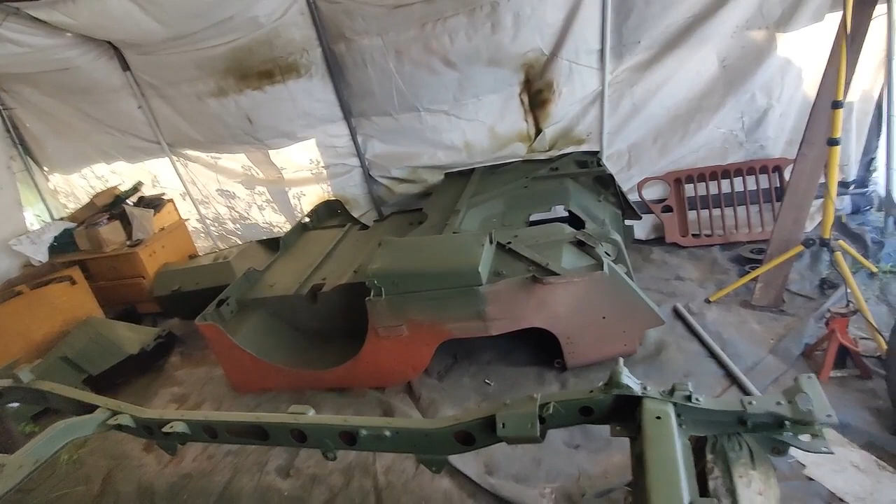If you saw the previous video, you know that we were basically just refurbishing and painting parts. But today I'm going to start assembling the chassis.

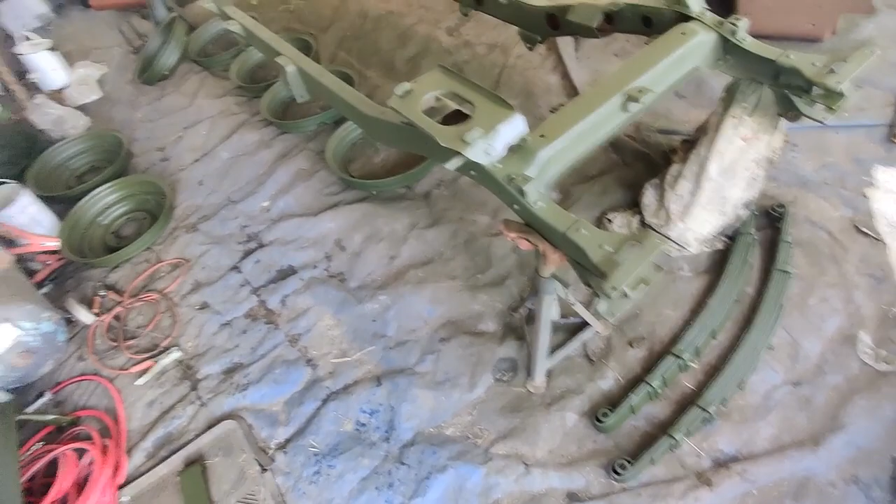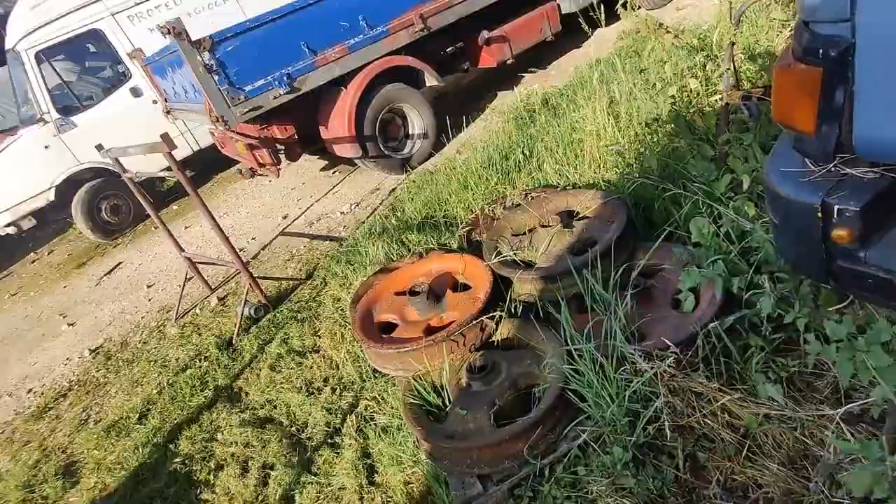We've got basically a chassis kit - brake lines, rubber mountings, just everything we need to get a rolling frame put together. So we've got everything laid out where it goes: front springs down there, rears are at the back, shackles and everything down here. Axles are still outside - they've had a couple of weeks to dry now.

I'm in two minds what to do. Not sure whether to do the assembly work out here, because we do have to take these drums and everything off. Not sure what has been done inside, so I may as well take a look to see if there's brakes and everything in there. I mean, they spin quite freely.

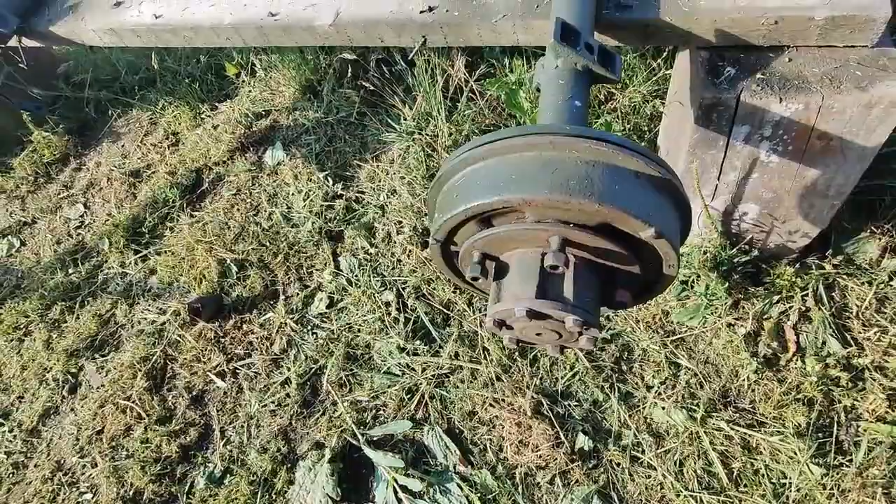So I think the first order of the day will be to get the kits brought out and just get everything laid out. I just need to make a plan of action right now. These are all the painted rims - they've been sitting in here just to keep them out of the way. We've got a stockpile of stuff around the place, paints and what have you.

So I think I might just get the axles mounted, and do the brakes later. Yeah, I think that's the plan for today - let's get the axles in, get the springs on, and get them actually mounted to the frame. Things may change though, you know how these things go.

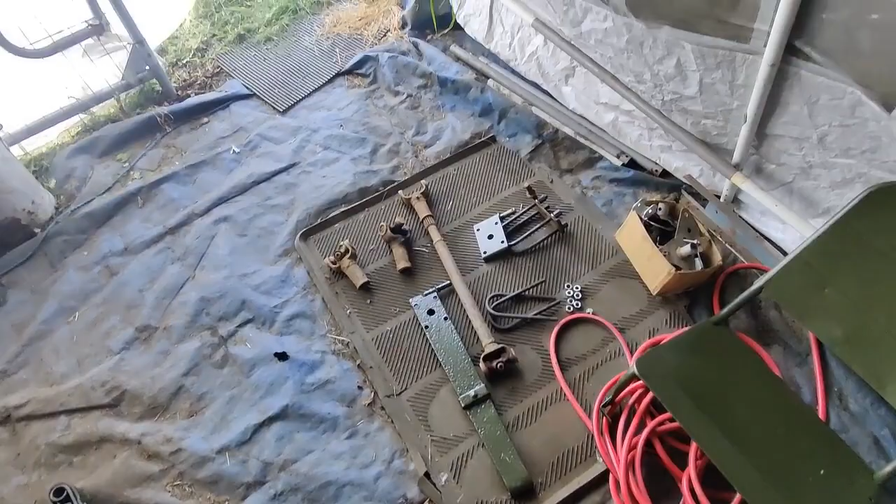Before I go racing ahead, what I've done is gone round and pulled out all the parts for actually mounting the springs, just to make sure that they're actually here - and yes they are. So there's the shackles, with the bolt that actually bolts through the frame, same over there, and same on the front. Got all the other bits here which I already knew were there.

So there we have the rear springs loosely in place, and we've got those front mounting points hooked up. What I'll do next is lift the rear of the springs, put a couple of blocks under them to get them a few inches off the ground. Then I'll lift the axle in, sit it on the spring, and we'll be able to bolt it up there - makes it easier to lift into place and get those rear shackles on. Then of course we'll repeat that with the front.

Well, we've got the axles manhandled in here now. That one's sitting roughly in place. This one, I still need to get the springs hooked up, but we'll get to that shortly.

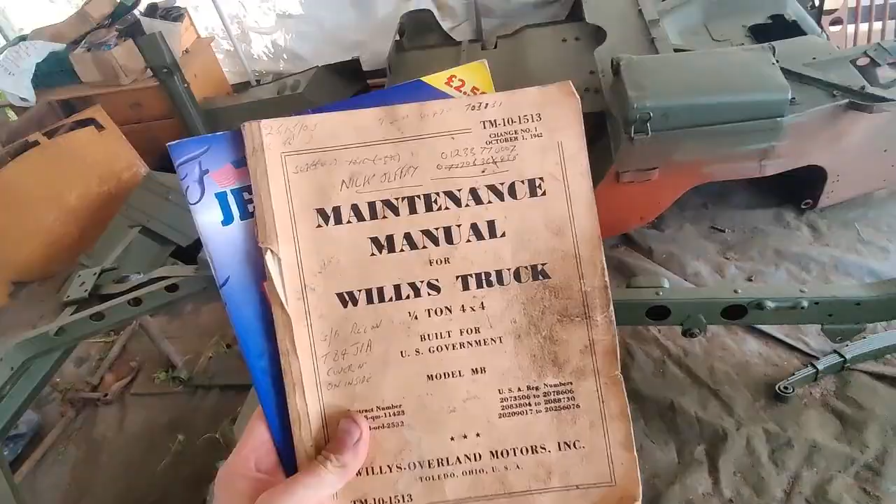Meanwhile, I'm gonna stop for a cup of coffee and have a bit of a meander through these manuals, just to become familiar with some of the little eccentricities, because mechanicking is mechanicking - it's pretty basic stuff, but there are nuances.

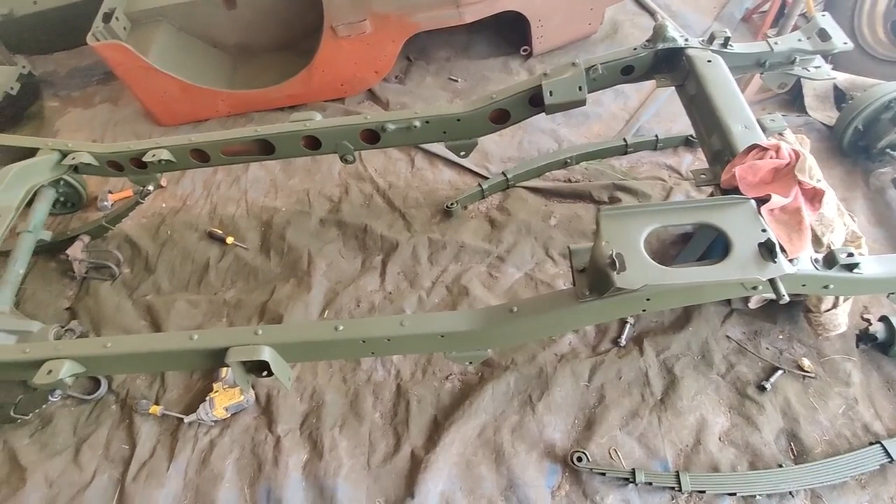For example, those shackles that I painted earlier - the way they were mounted on this frame when it came in - just a quick glance through the manual showed that was incorrect. I would have mounted them back the same way as they came off, but no. They were probably just put on that way to roll it around, but nevertheless it's still an important distinction - they were the wrong way around, and although they would work, from what I understand they will actually basically wind themselves off, so they need to be put on the correct way. It's little bits like that that make the difference. Anyway, kettle should be boiled, let's go get some coffee.

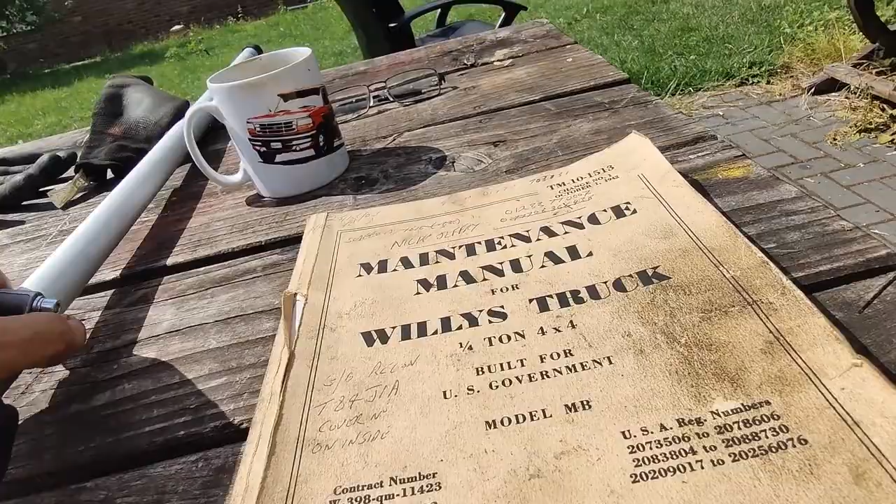Okay, so here we go. Ended up with tea because we're out of coffee - didn't know that. My trusty old Power Stroke mug. Let's have a quick look through these.

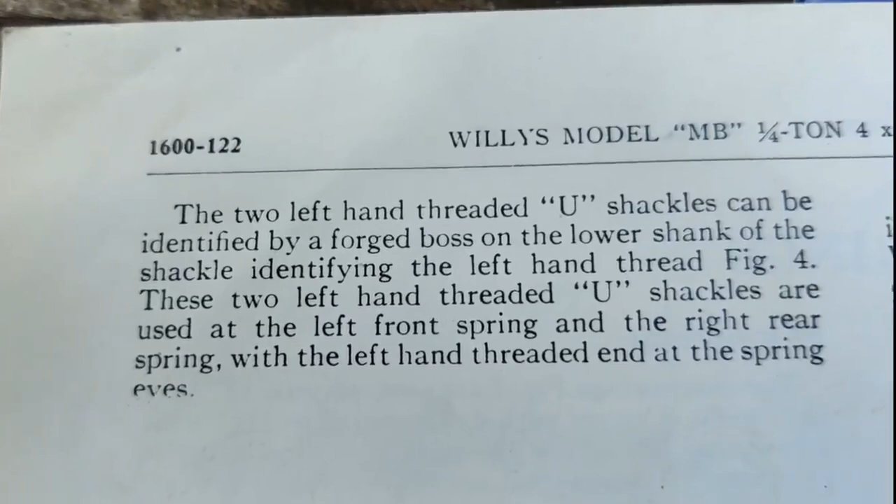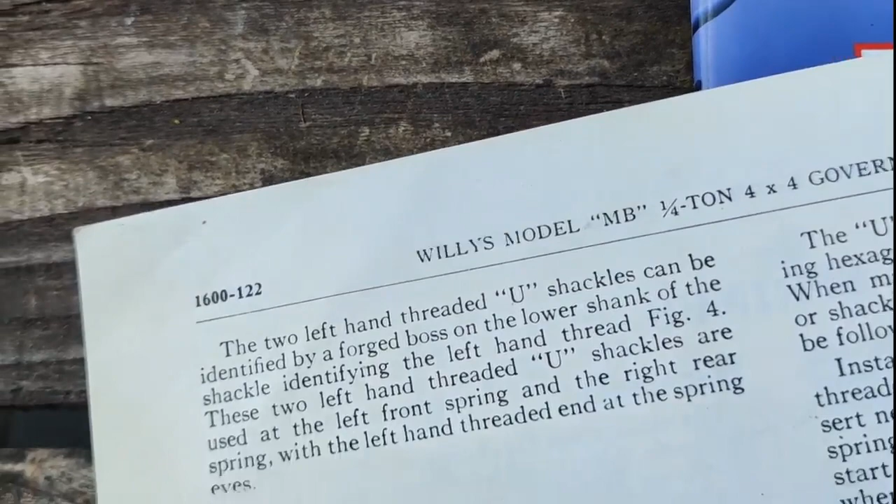I'm not sure what year this one is, could be 1940s. It's for the Willys version, and we're using predominantly Ford parts, but it's basically the same - not a lot of differences. So basically what it's saying is that the two shackles with the left-handed threads - one goes front left and rear right, with the left-handed thread sections actually going into the spring itself.

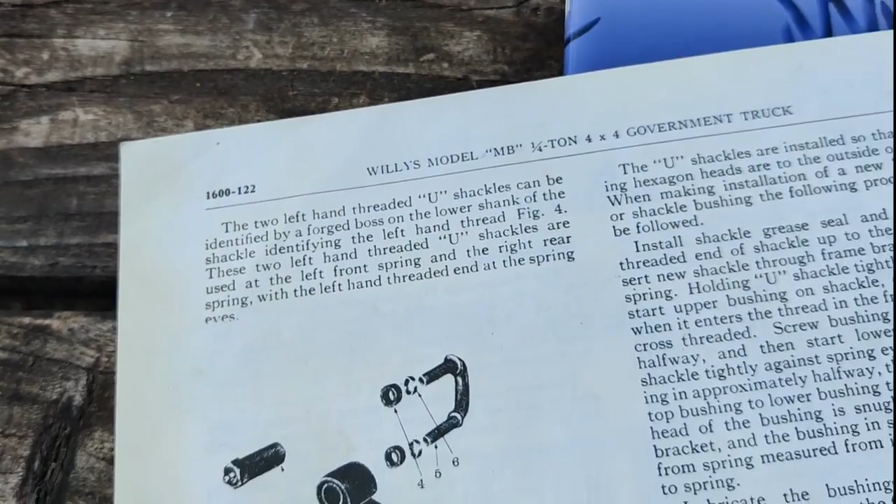So yeah, this is what I was talking about - these little nuances that you need to be aware of. I'm going to finish this cup of tea, have a quick look through this, and then we will go get them mounted. That's a little interesting fact - now where are we at?

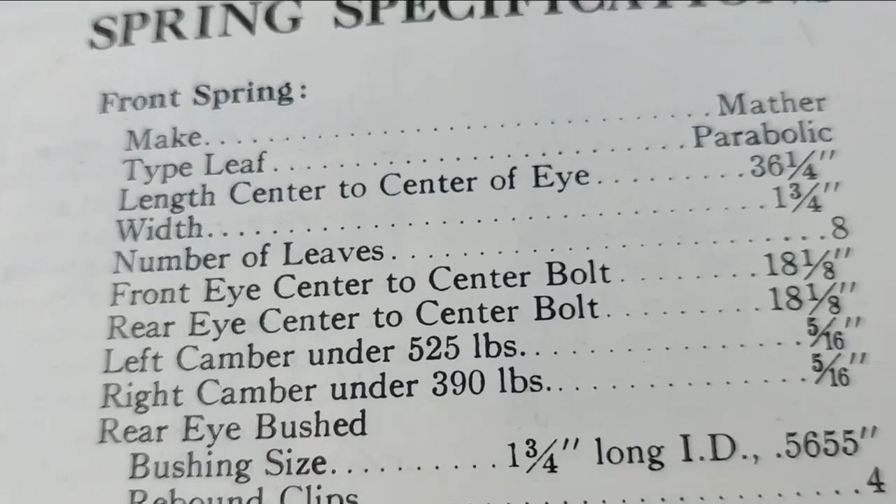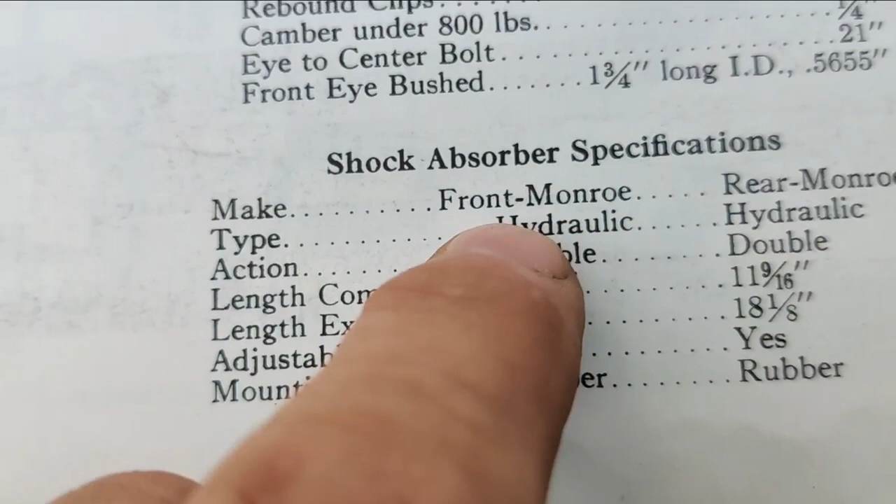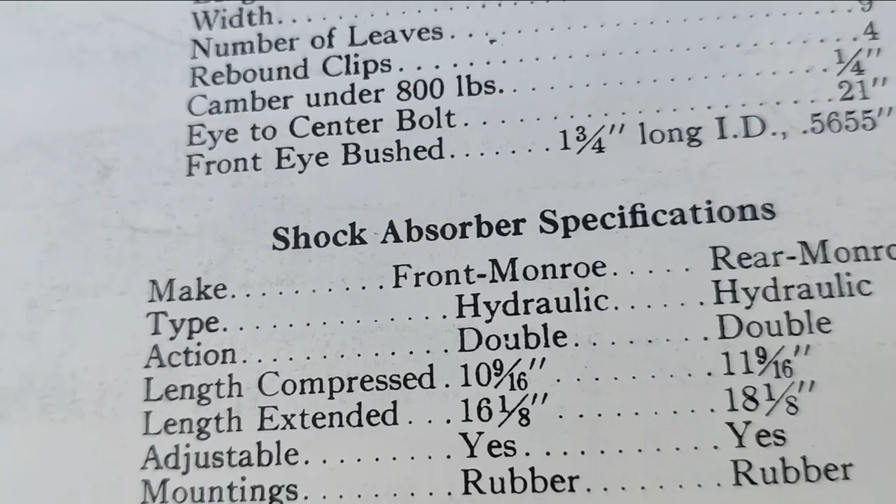The shock absorbers there - front Monroe, rear Monroe. What do you know? A lot of people think Monroe is aftermarket, but guess they were doing stuff back in the war.

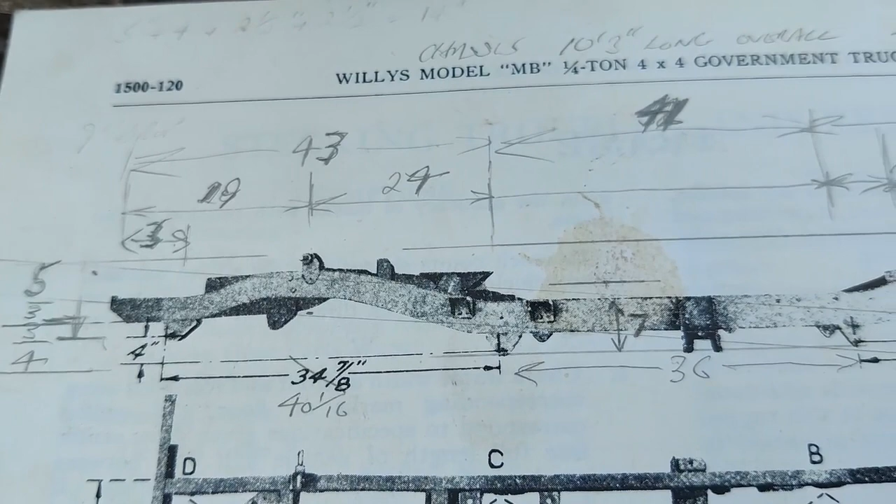Oh, will you look at that? We've got frame specifications. I love these old manuals, they have so much information. This is exciting because when we come to build the replica World War II Jeep on the Suzuki chassis, we've actually got some dimensions to follow, especially for things like mounting points. Very cool indeed.

Springs now attached at one end, and we are about to roll the axle in.

One question someone asked last week was why I don't do videos where I've got the camera set up and record everything. In all honesty, the simple answer is time. Setting the cameras up, getting everything right so you can see what I'm doing, that all takes time. Because the Transit in particular is running so far behind schedule, everything I'm doing at the moment needs to get done quickly, and that doesn't leave much room for setting up cameras.

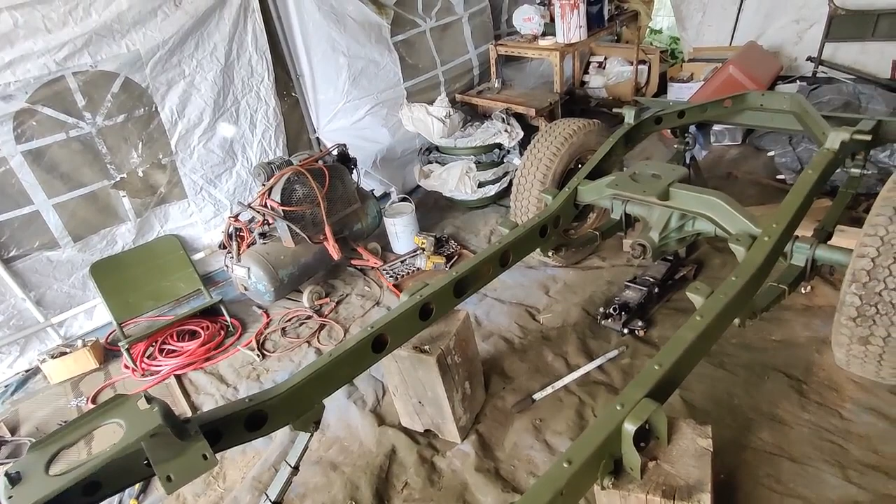The only difference is we're using slightly different paint - rather than the conventional modern etch primer, this will be etched but go into red oxide primer, which, keeping with the military theme, mainly because if you use grey primer you get a different shade of green than if you use red oxide. Because we're trying to get that military feel, we want to use what they used back in the day. The green we've got is a little bit transparent, so the primer undercoat does make a difference. So that answers that.

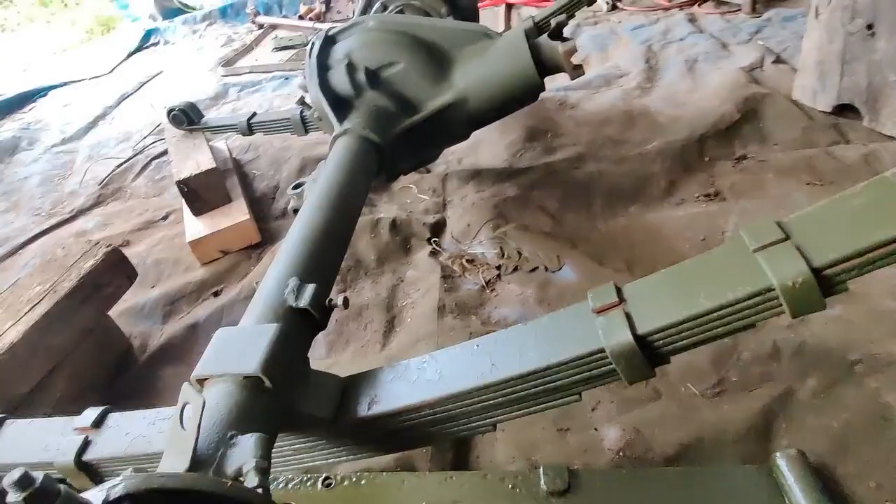So anyway, I'm going to get on, get this axle slid under, get it lined up and get it bolted on. This is one of these interesting little aspects I was talking about earlier.

This basically acts like a slapper bar on a drag car. It bolts under here where the U-bolts go through it, and it comes up under the spring here, and then there's a bracket that joins them together. I guess the idea is it reduces any torque axle twist when you're off road trying to climb a steep hill or something like that. It's just an interesting little piece of engineering, thought it was cool, so stuck the camera on. Anyway, let's get it fitted.

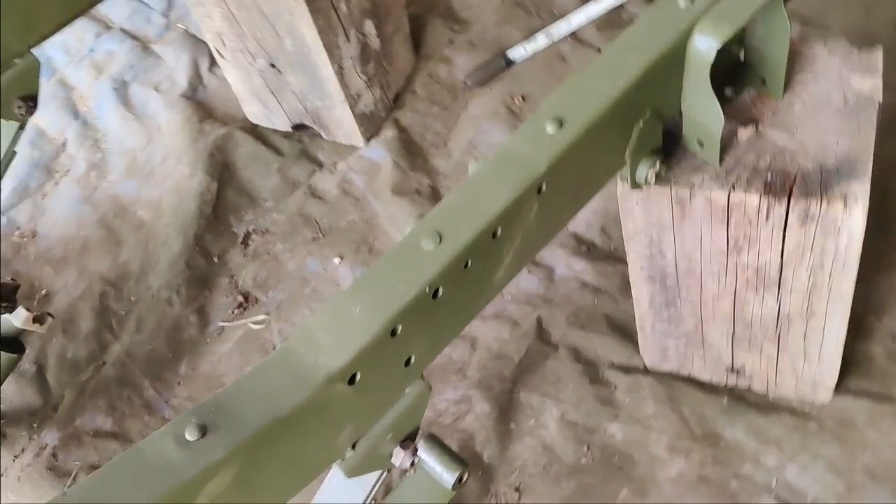Well, there we are. We've still got the actual bracket that goes from there up to there - don't actually have that, that's got to be sourced still, but otherwise the axle's in place. So I'll get it jacked up and get these front shackles in, put some air in those rims and tyres, and we are in good shape.

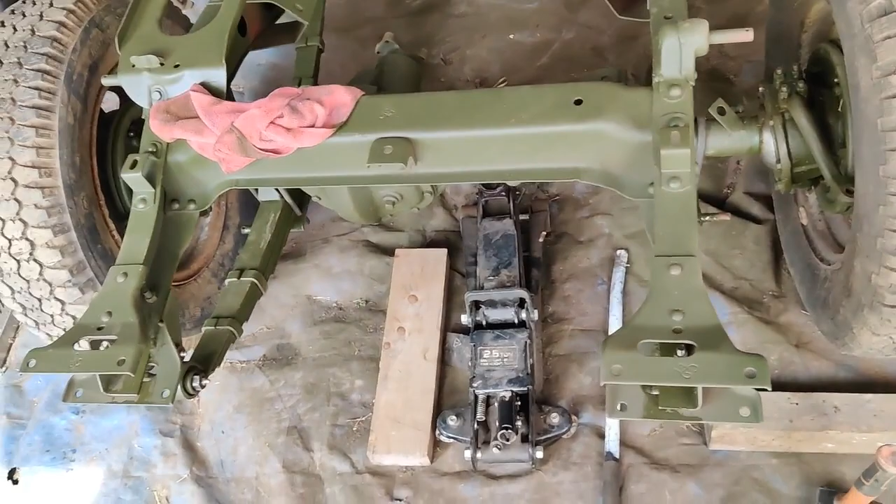So let's continue. Well, there we go, we have a rolling chassis. Now I was going to put the track rod on across the front here, but it needs a lot of work, complete refurbishment. So I don't need to put that on - we can just move this about without having to mess about trying to keep the tyres straight. We did it before, we can do it again.

So that's it. Tomorrow I'm going to roll this outside. Like I said earlier, I want to get all these little bits, these little nooks and crannies I've missed, all painted. There's a couple of areas that have gotten scratched on the springs etc, but that happens. And there we have it.

So yeah, these are Suzuki rims. We're just using them to roll it around on because we have them and the tyres hold air. These are from the little 4x4 Suzuki, the Jimny or whatever they're called. Same lug pattern, 5-on-5, that's 5 bolts, 5 studs, 5 inches apart.

Although the diameter, I'll look it up. It'll explain how to work out the diameter of the wheel studs. Anyway, yeah.

Next is this front end. I think what I'm going to do is set these wooden blocks under the frame here and over there, where the transmission cross member goes on. Then it'll clear this whole front end up, and it'll basically be rinse and repeat. We'll get this front end on, get the rims on, and we'll have a rolling chassis.

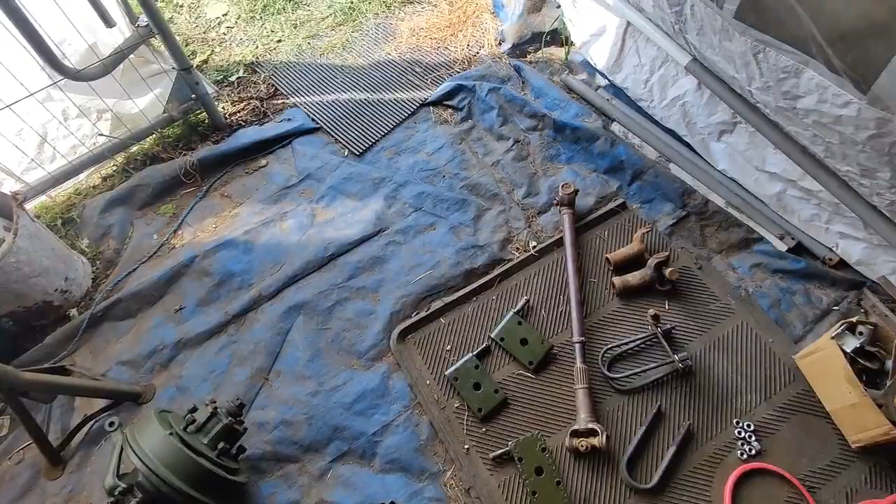So yeah, moving along. Well, we've run into our first problem. I'm working on that rear left corner, and if you look closely here, this is the plate for that back spring. Now the problem is, this is a front one. If you look there, they are identical. Now I've got an old rear one, and if you put that alongside to compare, spot the difference.

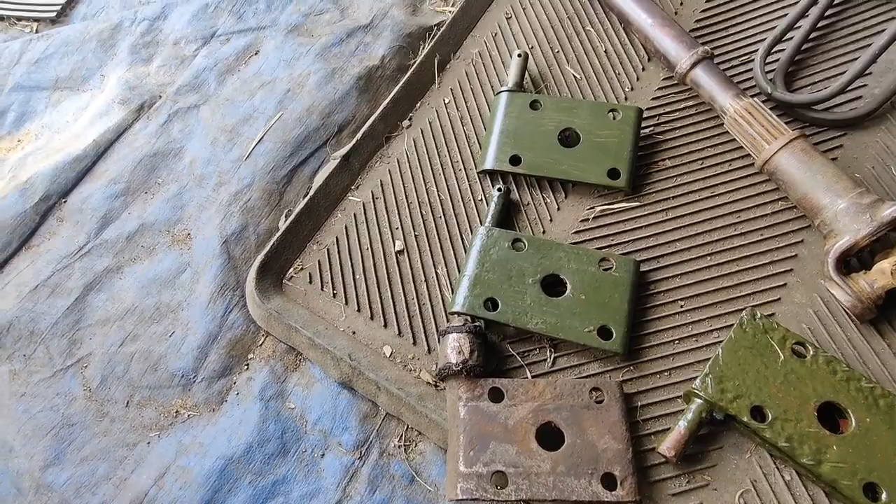So what appears to have happened is when these were purchased and sent to us, rather than sending a front right and a rear left, they've sent us two front right. So, yeah, options. Well, it does line up there, that lines up okay, but I don't know if you can see down there. Basically the bolt holes don't line up, that's the issue.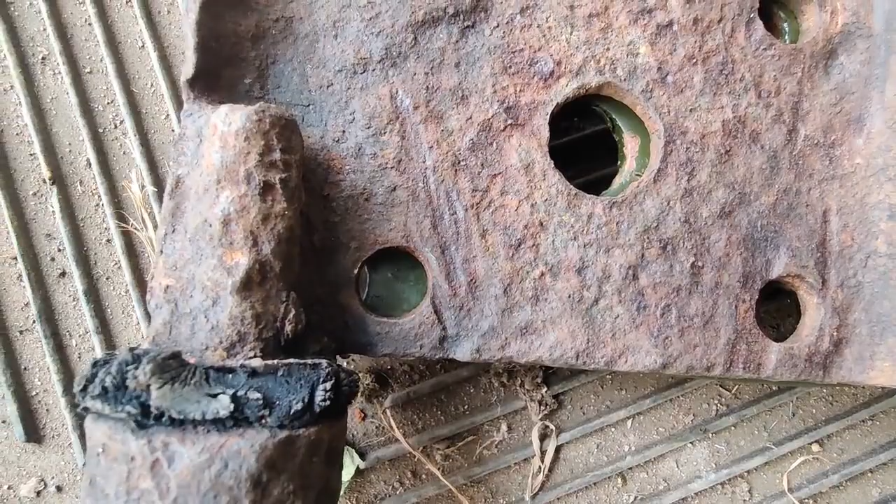So what I'm going to do is fit the old one for the time being, just so I can roll it around, but I can see it better that way if I sit that on top of there. See, those two line up okay, but that one there is in the wrong position. There's no hole there for that bolt, and that one of course is fine.

So I'll stick this one on for the time being. I'll see Andy, the owner, see what he wants to do, whether he wants to try to get hold of the correct one, or whether he just wants to drill this one out. Either way it'll work, it doesn't make that much difference.

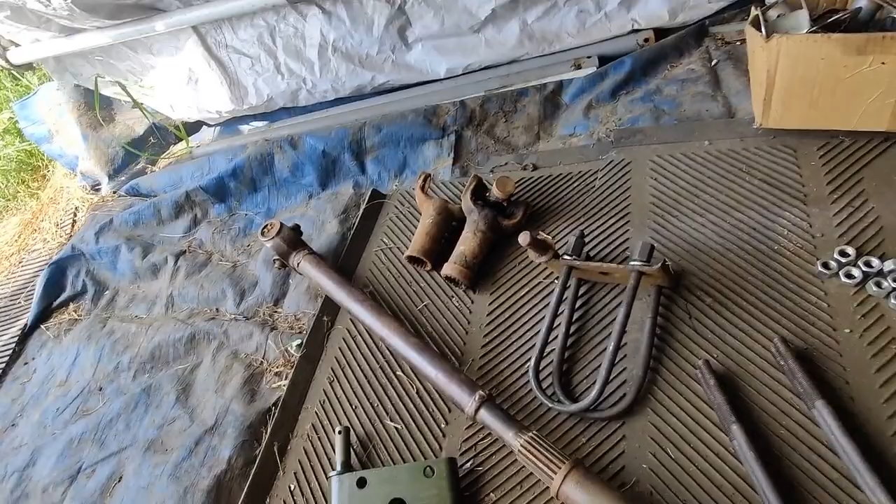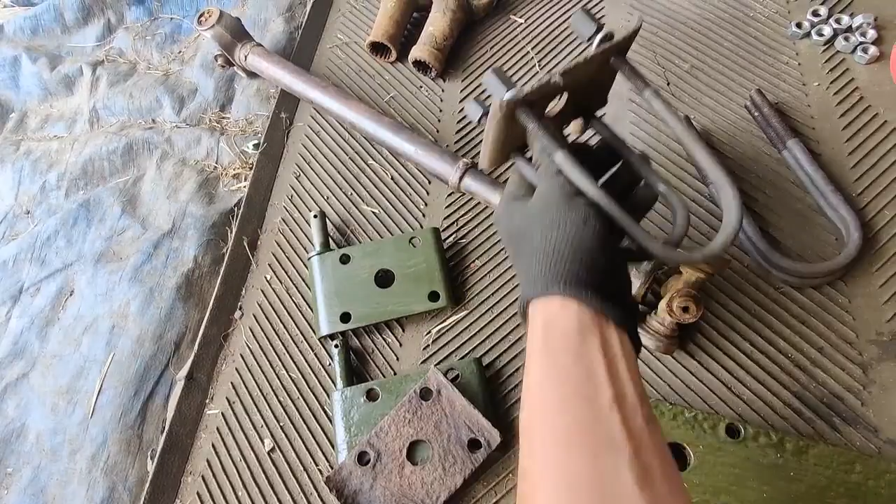The only real difference is the front one is wider on that section there. See one of the U-bolts is wider, and that's because it has to go over part of the differential. So one goes over the tube here, one goes over the actual edge of the differential, so it is wider. Anyway, I'm going to put this old one on for the time being and just keep things rolling along.

Well, now I've got that nicely located. Obviously I've used that old bracket for the time being. So I think what I'm going to do next is roll the jack under. These are just hand tight, I haven't got those cranked up yet. I'm going to roll the jack under and lift this up into place.

Then I'm going to double check on the manual where these shackles go. I'm pretty sure one goes to the driver's side, the front left, and the other goes to the rear right. They've got a left hand thread on them. So I'm going to double check that, but that's what I'm going to put on next.

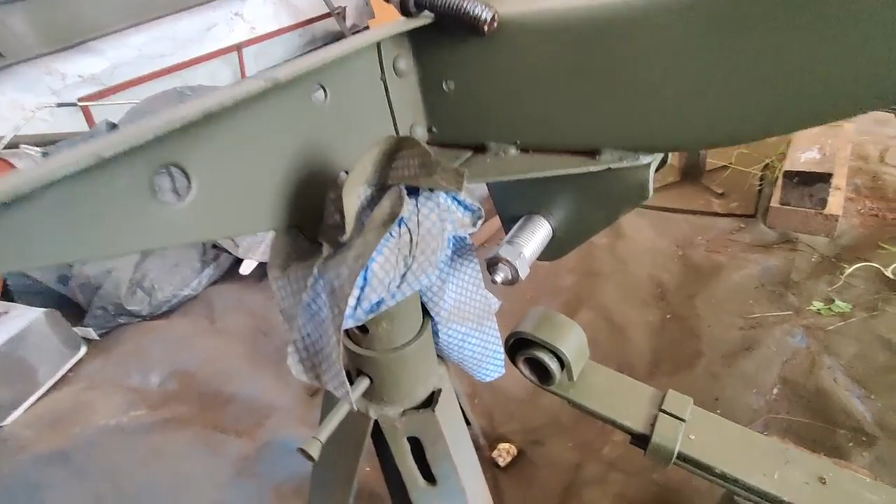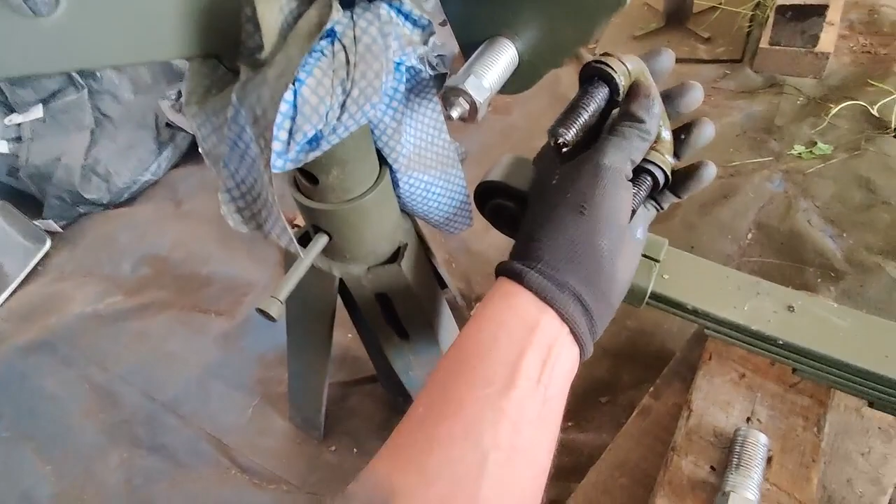Very interesting how this goes together. First of all, this outer sleeve here actually screws into the frame, and this goes in from behind, so as you're screwing it into the frame, it also pulls this in. Where are we at? Yeah, when you line that up and start screwing the outer nut in, it pulls the two together. That will lock on the frame, but this thread will still remain loose, but it won't wind out.

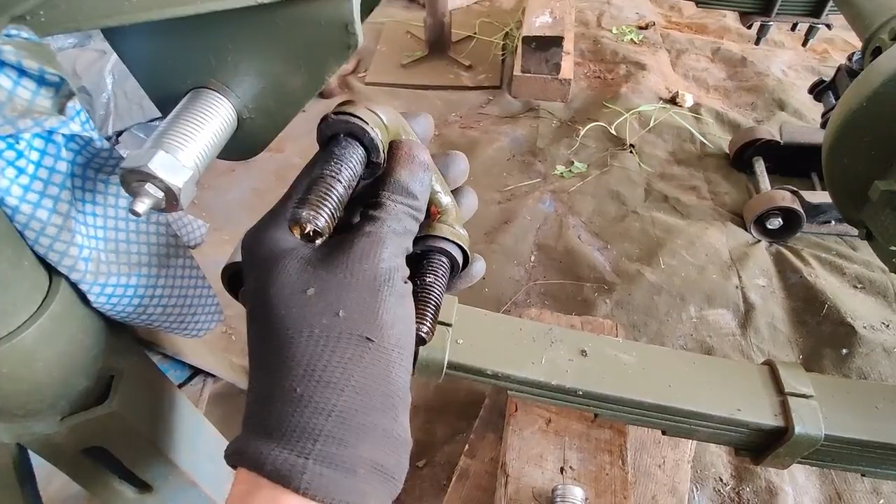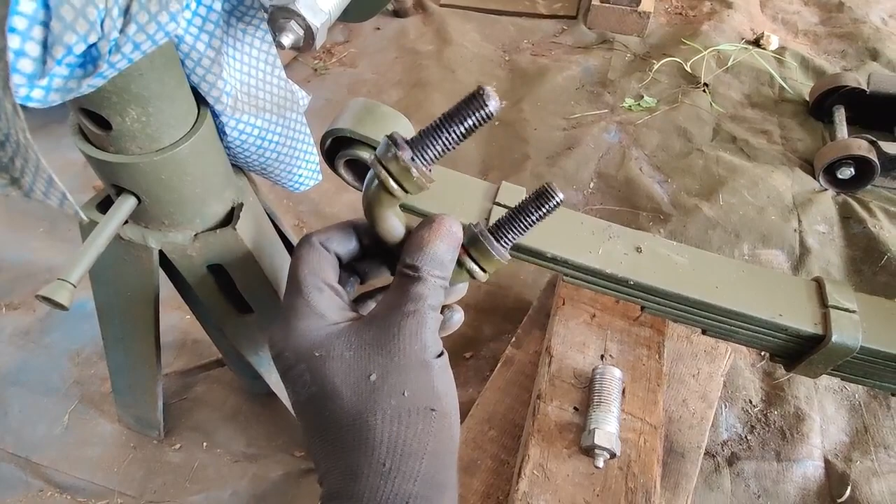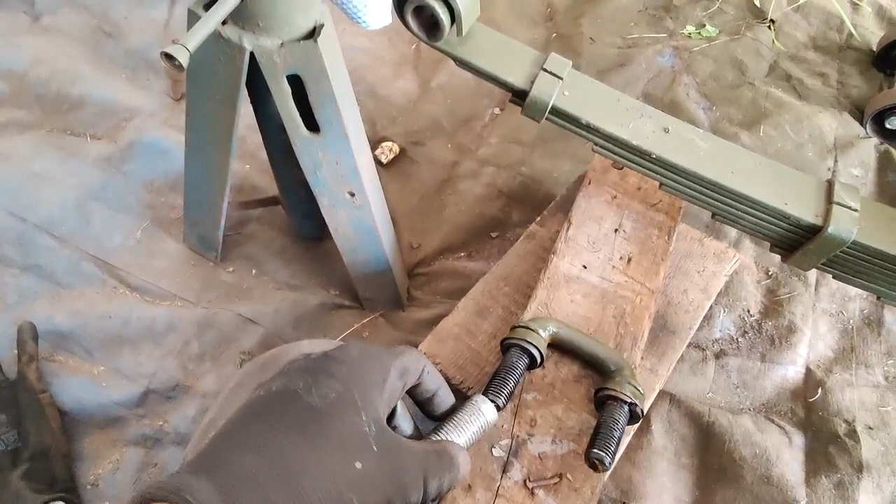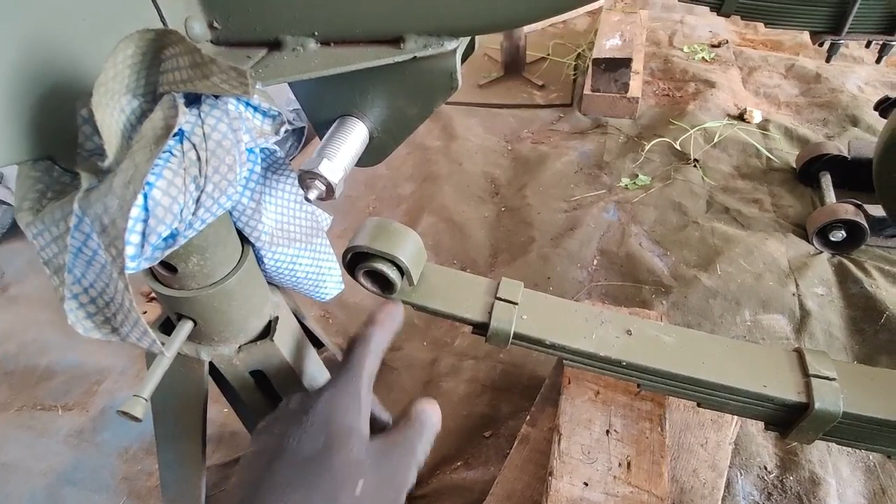Interesting. This is one of the things I love about old engineering. Sometimes you just find some of the most unique solutions, and that's not one I've come across before, I think it's cool. But anyway, this is the one that actually is the left-hand thread. So yeah, that's the left-hand thread, and that goes there, which is the rear right-hand side. Apparently it's because they had issues with these unscrewing, and same with the front, so what they did was put a left-hand thread on it, and it cured the problem. Good old engineering.

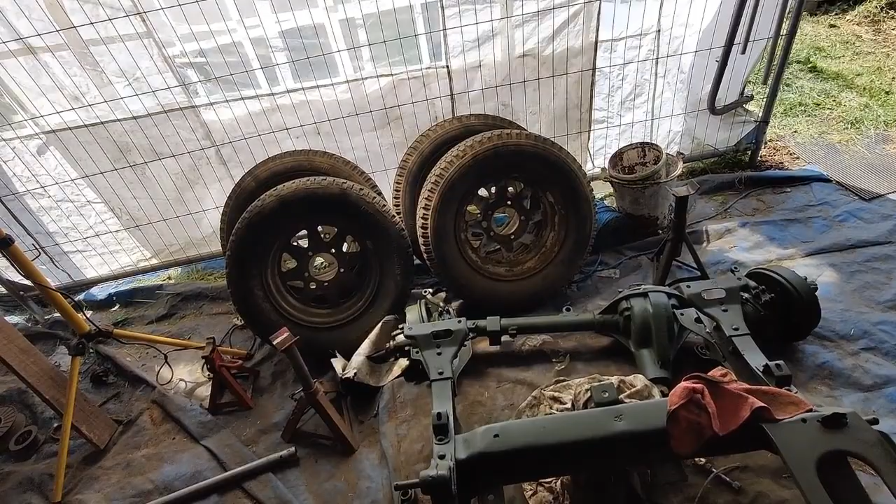Progress. Rear axle is now bolted up. One thing I haven't done yet is torque everything, because I'm going to wait until I've got the wheels on and there's some weight on it, then we'll go around and torque everything once it's all basically bolted together. But we've now got the rear end ready to roll. What I'm going to do next is go over, put some air in these tyres, and get some rims on the back there.

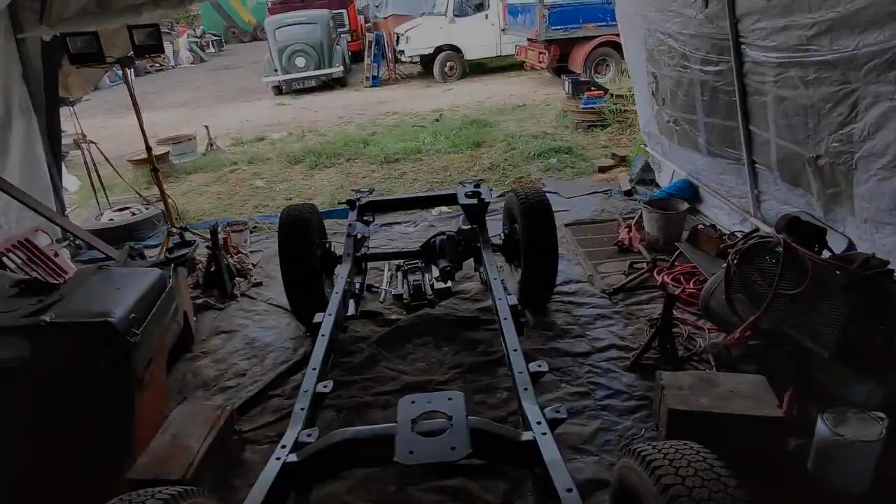Well, here we are again. I've got the front of the tent open there. I'm going to push her outside, and plan is I'll just sit her around here somewhere so I can get some light into these areas that I missed. I might stick her up on jack stands, get the spray gun over here, and give her a nice coat of paint, pick up all those areas that I missed. Seems like a good plan, let's see if it pans out.

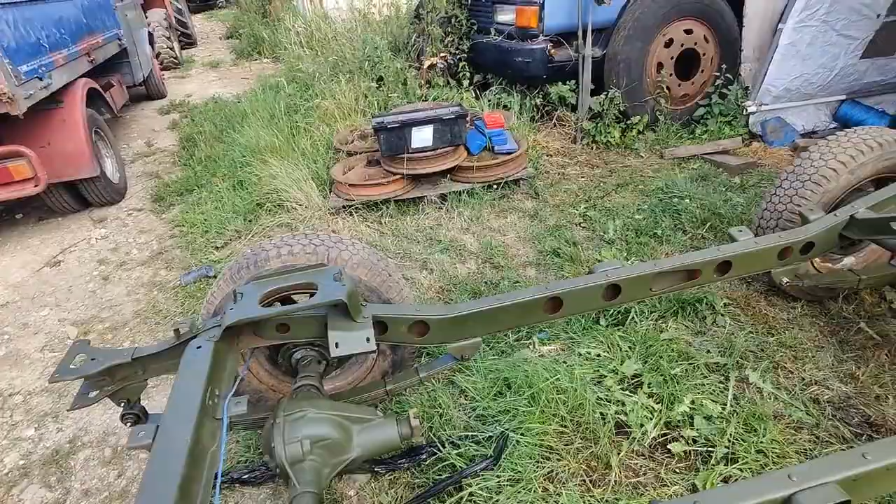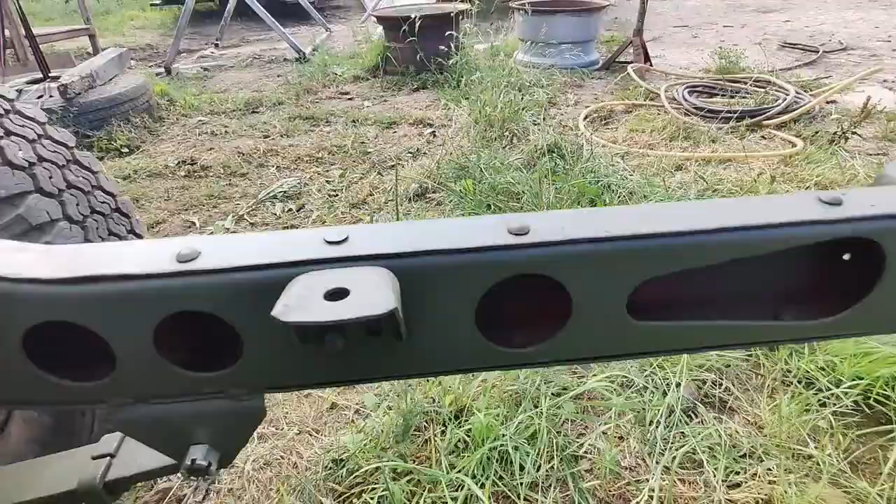Oh, I've got her outside now. It's not too bad down there, but where you can really see, there's a little bit under there that I've missed, there's a bit in there. This is where it's worst, in there. There's a little bit I think under there somewhere, and a little bit in there, bits and pieces here and there. But given how dark it was, I'm not concerned. I knew there would be some sections that I'd overlooked, that's how it goes.

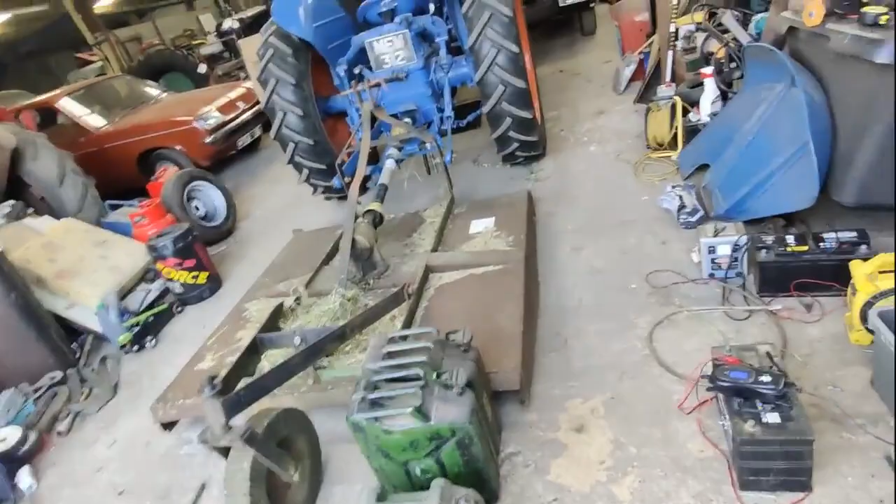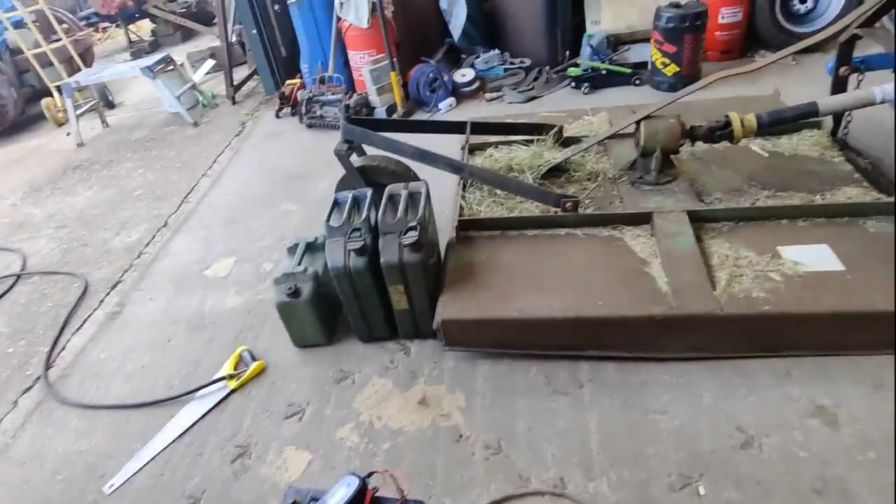Houston, we have a problem. Wait a moment, is that back on? We lost power here in the shop for the past 20-30 minutes, could not get the compressor up and running. We had power to the lights and the door, but nothing to the sockets or power outlets. I just noticed that battery charger is now back on, so... oh wait a minute, I unplugged it. Let me plug this back in and try this compressor again.

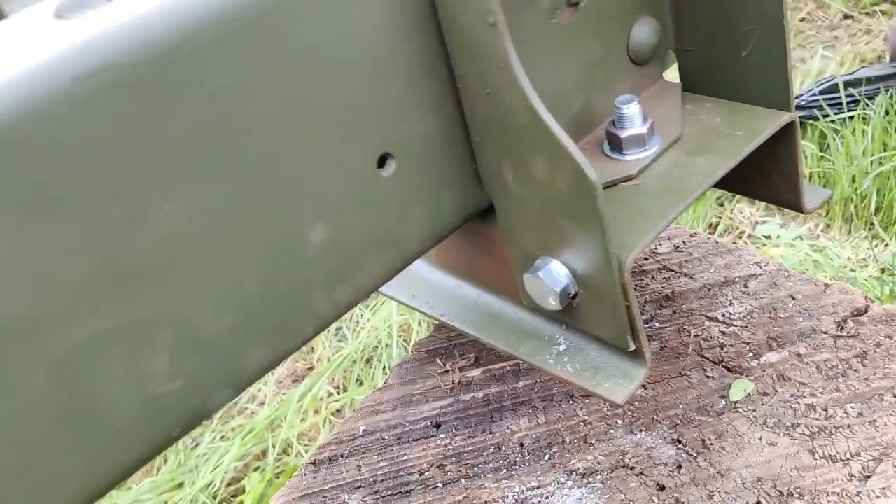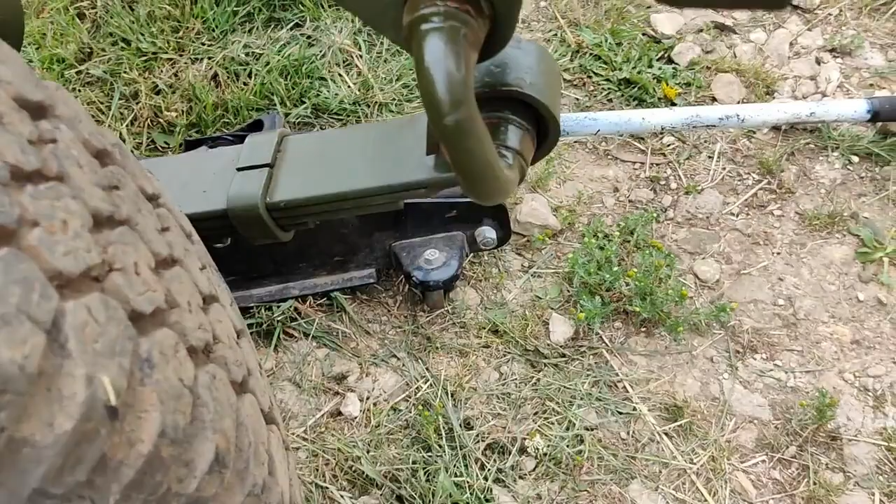Hell yeah, we're in business. Okay, we now got that fitted better. I will, however, take this back off when I'm painting stuff later, and I'll prime all of these bare edges. The other thing I've got to do is, I somehow managed to put that front shackle on backwards yesterday, so I'm going to do that now, and then that's it, all sorted, and we'll continue with the assembly.